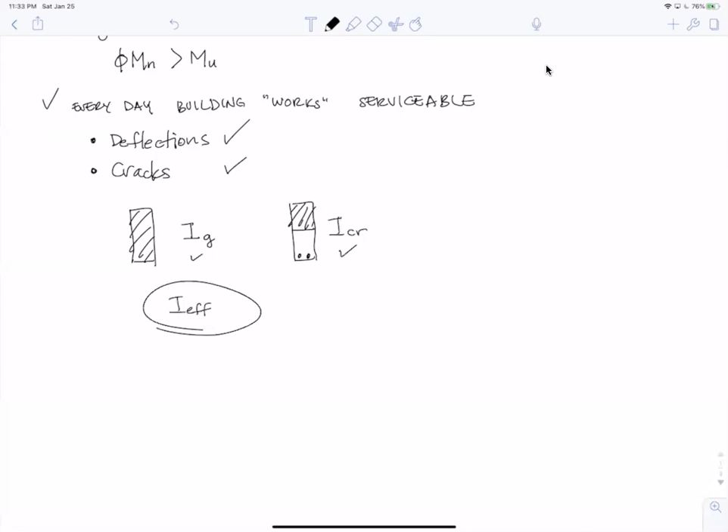It's not too bad. This cracked moment of inertia, which you don't know how to do yet. And then you're going to have some kind of averaging of those two things. And you're going to have to average it over the length. So that's what makes calculating deflections complicated, number one.

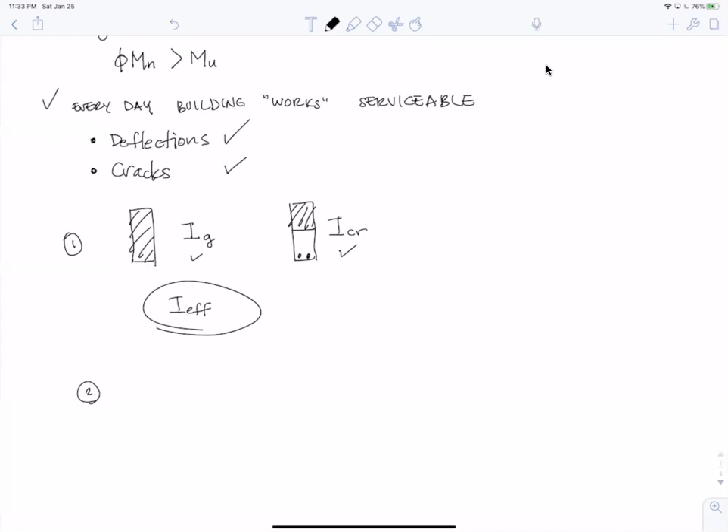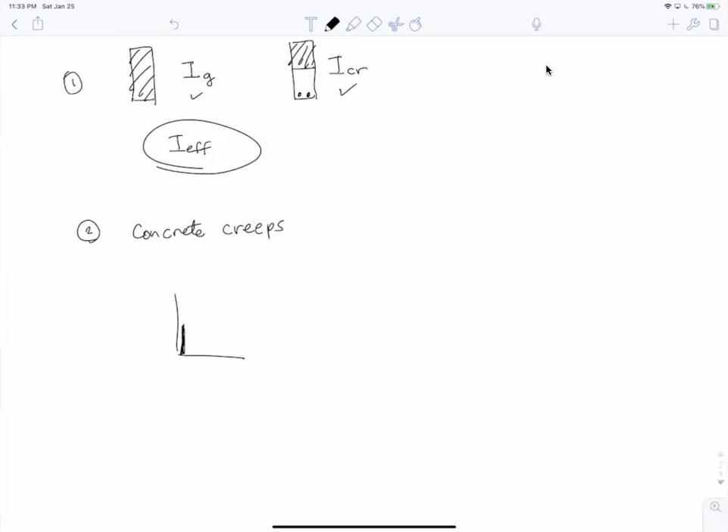The second reason calculating deflections for reinforced concrete beams and buildings is hard is that concrete creeps. And what that means is that if you load concrete and it deflects a certain amount, over time that deflection increases. And this extra deflection eventually can be 2 to 3 times the delta initial, the original deflection. And we'll talk more about that.

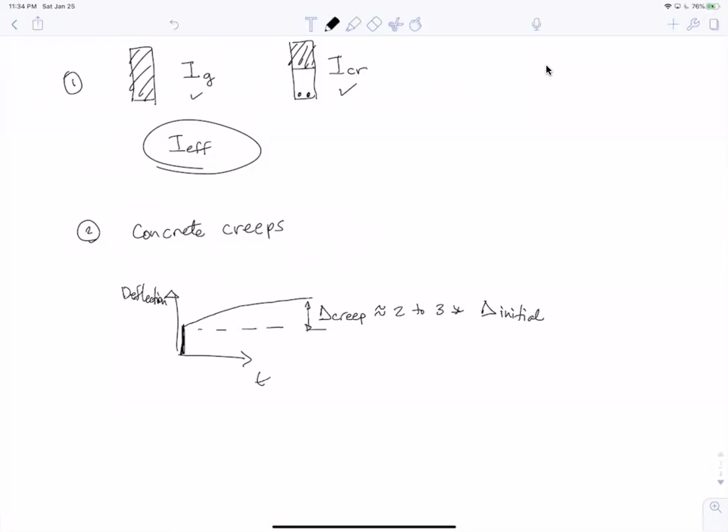What makes this complicated is that not all the load is on the beam all the time. The dead load obviously is always on the beam, and so that will creep. But the live load, sometimes there's people in the classroom, sometimes there's not. But there's a certain percentage of live load, like desks and things like that. They're considered live load, but they're pretty much always in the room. So those sorts of things stay there forever, and those go into the creep deflection.

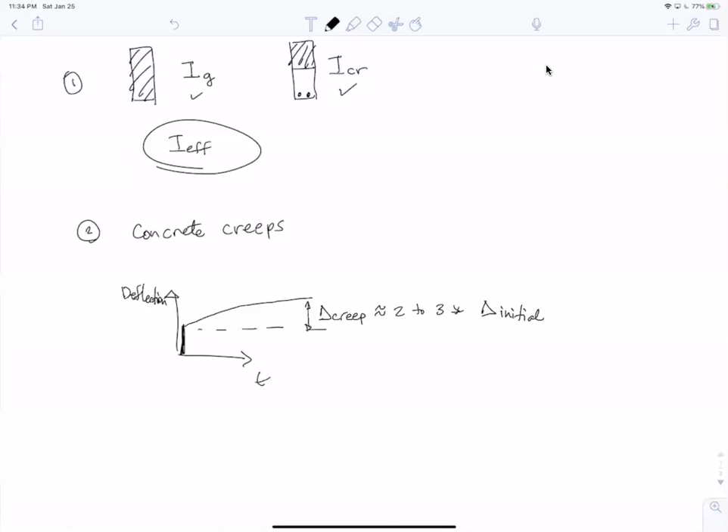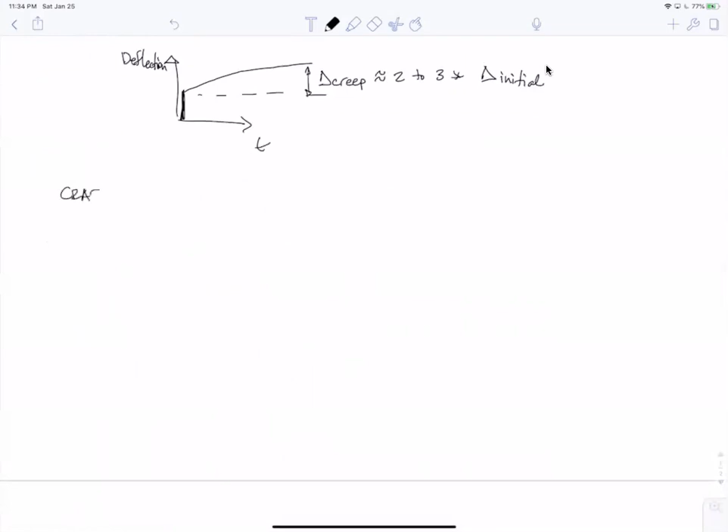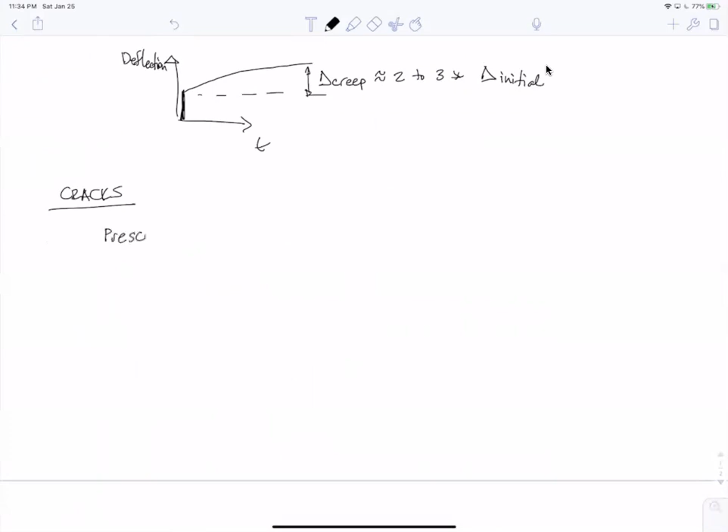Okay, so that is the first half of serviceability, deflections. The next part is cracks. Basically, we're just going to have some prescriptive rules about how much steel to put in the beam and where. And if you follow those rules, we sort of guarantee that the cracks will not be too many and will not be too wide. Okay, and so that's serviceability.

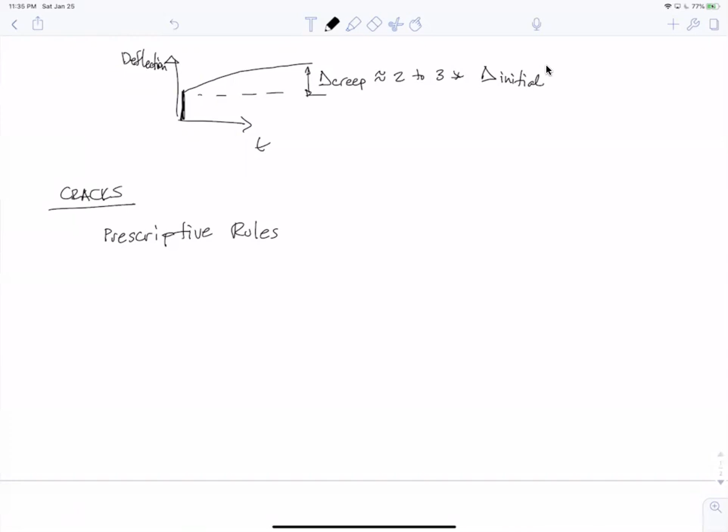But now I want to talk a little bit about serviceability and limit states here in Japan. So what I've just talked about: we have one, phi Mn greater than Mu. That's the worst case scenario. And then two, we have everyday serviceability. So it's either worst case scenario or regular everyday. You would think that there'd be something in between.

And here, they do have two more. I can't remember what they call it, but basically small earthquake and then medium earthquake. And then the huge earthquake is this phi Mn greater than Mu. So they have 4 levels of limit states here. They have serviceability, everyday, ultimate, and 2 in between. That's what they're proposing. A lot of the papers I'm reviewing are about that. So there you go.

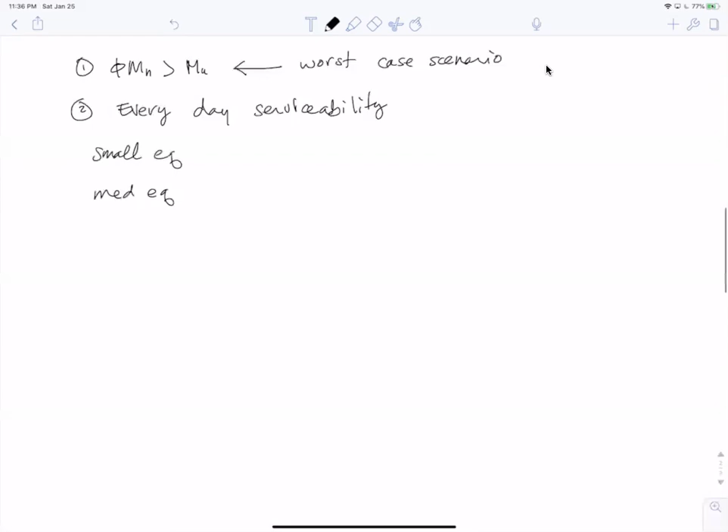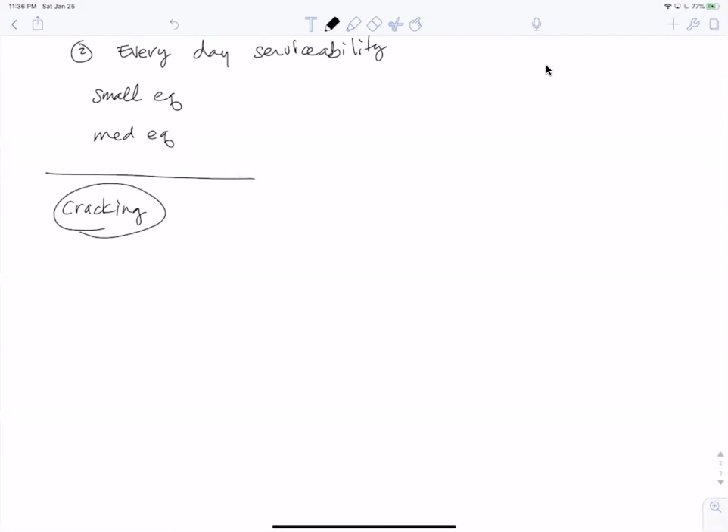Just today, I listened to a talk and I'm reviewing a paper on cracks. And cracking, this was in columns. And the reason they're doing this is because you need some way to define these 2 intermediate service states. And what this one guy was doing was relating it to the amount of cracks. And so they actually have models and methods here to predict the number of cracks and how wide the cracks will be,

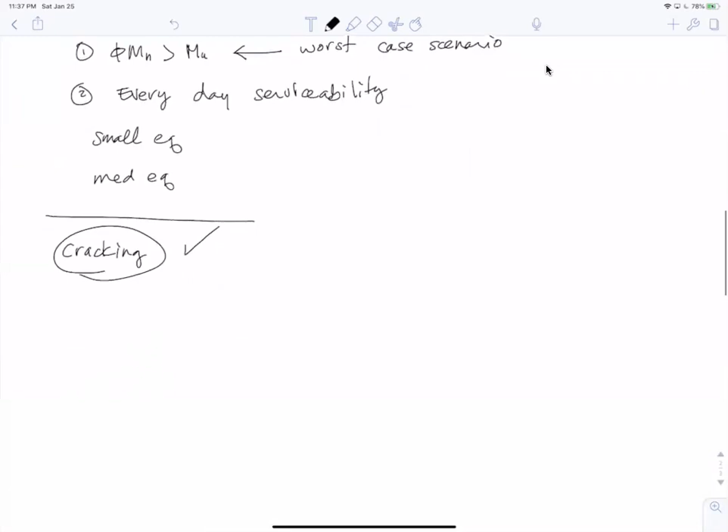and how much these cracks are contributing towards a building drifting over. And it's kind of a big thing here. The cracking analysis here is much more quantitative than what we do in the United States. We can talk about this more when we get to the serviceability section of the course. But anyway, this is the second to last topic for our brief overviews. I'll end it with a little talk about columns next.